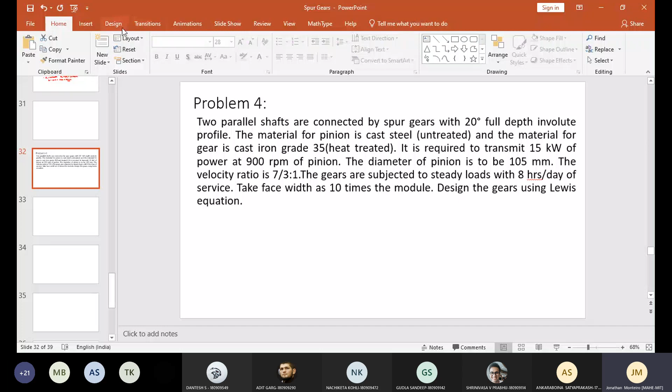There are two parallel shafts connected by spur gears with 20-degree full depth involute profile. The materials given are cast steel untreated for the pinion, and cast iron grade 35 heat treated for the gear. We have to transmit 15 kilowatts of power at 900 rpm. Diameter is given, so in this problem the point is that diameter is given.

So I can write it here: in this particular problem, diameter is given, velocity ratio is 7/3:1, and alpha is 20-degree full depth.

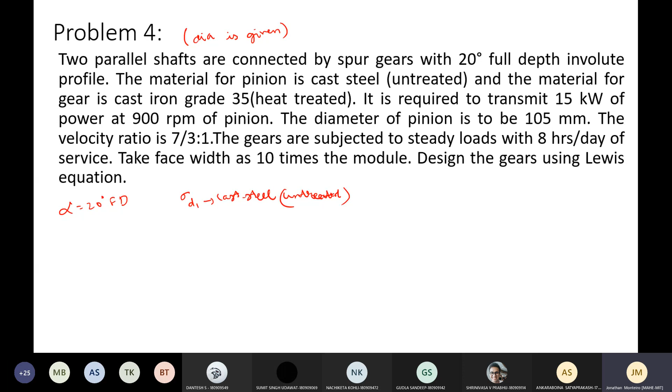Regarding the material, the pinion, sigma D1, is cast steel and untreated. If you look at the book under table 12.7, we have become quite familiar with this table now, because we take both the design stress values and BHN values from it. With cast steel, there's only one type discussed there, so you can straight away take that. We will mostly use this table for all the materials, since we have sigma D and BHN values readily available over there.

So with this cast steel untreated, sigma D1 comes to 138.3 megapascals, from table 12.7 on page 234.

Then we have sigma D2. The material is cast iron grade 35, and it is heat treated. According to table 12.7 on page 234, sigma D2 comes to 78.5 megapascals. You can check it in your data handbooks.

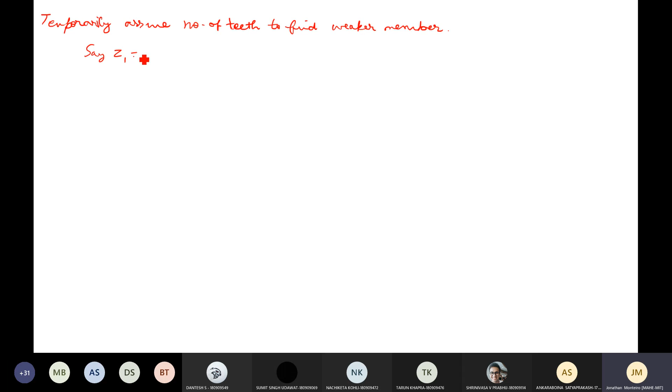Say for example, this has 20 teeth, 30 teeth, etc. In the previous problem you assumed it was say 20 teeth, but if you use 20 here, suppose Z1 is 20, we did this with one of the previous problems. But what will happen to Z2? You see the ratio here, it is 7 by 3.

The ratio is 7 by 3. So Z2 is I times Z1, that is 7 by 3 into 20, which will give you a number of teeth that is approximate, not exact, because if you make it exact you will be left with decimal values of teeth. So avoid this, because since 7 by 3 is given, we know teeth must be a whole number. Any suitable combination will satisfy this.

Of course, you can directly go with 3 and 7, but the problem is 3 is not a very practical number of teeth, and you will totally agree with that. There is no gear with just 3 teeth that will run successfully. So let us not go with 7 and 3, and let us not go with 20 either, because you will simply get some decimal value that cannot be approximated.

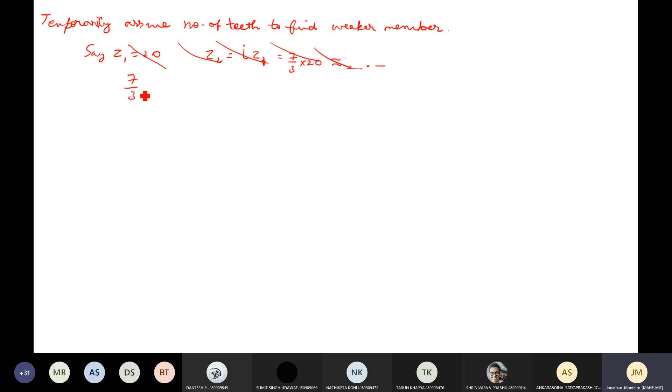So what we'll do instead is multiply the ratio 7 by 3 by some number. How about multiplying both numerator and denominator by 6? This gives 42 and 18. Can you take 10 instead? Yes, you can take that too, 10 by 10 also works.

8 by 8, 9 by 9 also can be taken, of course it's left to you, it's your choice. But principally I've taken 6 because 18 is the minimum number of teeth we take in most cases. In order to reach 18, you multiply by 6. Whatever you multiply in the denominator, the same must be multiplied in the numerator to maintain the same ratio. So what we've done is multiply by a number closer to the minimum required number of teeth in all cases.

Of course, there's no hard and fast rule that 6 should be taken. You can take 7, 8, 9, 10, whatever, but take something that is practically advisable. Practically, 18 is the minimum number of teeth. There is a table we used in previous classes for the minimum number of teeth, so according to that, 18 is the minimum, so we'll go with that figure.

When you set this for 18 according to the ratio 7 by 3, Z2 will be 42. So what is this 42? This is Z2, and 18 is Z1. What we are looking at is the Z2 by Z1 ratio. So I'll write it here: Z1 is 18, Z2 is 42.

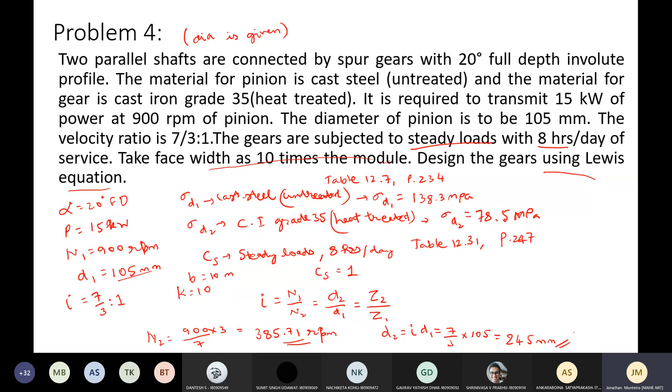So sigma D1 Y1, now compare how much it comes. Sigma D1 we have already calculated in the previous slide, it was 138.3 megapascals. So when you calculate, it will come around 14.28, and sigma D2 Y2 will come to around 10.384.

Even if you use any other values, of course these numbers will change, but definitely this result won't change. Sigma D1 Y1 will be greater than sigma D2 Y2. This conclusion will always be there. That is what we want for the time being, we want to find out which is the weaker member. So now it is very clear, the gear is weaker.

Because sigma D2 Y2 has come lesser than sigma D1 Y1, the gear must be weaker. So design for strength is based on gear.

We use the same form of the equation which we have used for unknown number of teeth, according to equation 12.5b, which tells us m is equal to root of ft by sigma d, cv k into capital Y. This is according to 12.5b, and we will use all the parameters based on this.

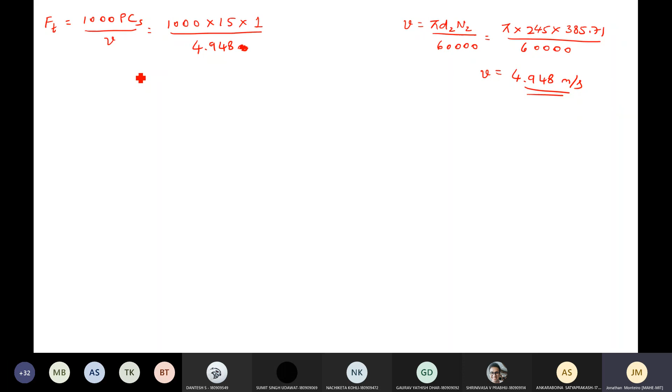So put that here, 4.948 meters per second. So Ft value will be how much? You are getting 3031.53, so 3031.5 or 52 or 53, whichever is closer, you write that. Ft is done, V is done, but we don't want V directly, we want Cv, the velocity factor based on V.

Since this is less than 8 meters per second, according to equation 12.6a, let me write the equation numbers here. So this is 12.7a, page 205. Yeah, so 12.6a, again page 205. We have a series of equations, the 12.6 series gives you the different velocity factors at different velocities. So this is less than 8, so 4.948.

Because of that, your CV value will be 3.05 by 3.05 plus V. So if you substitute it here, you should get 0.3813. This is your CV value. Just all the things I think we know.

So we'll find out what is m square y which is required. That is Ft 3031.52 by sigma d value. Sigma d is 78.5. Next is CV 0.3813. Then we have K, which is 10, and then you have a constant pi. How much is the value? 3.224, or 3.223 or 224, I'm getting around 3, fine.

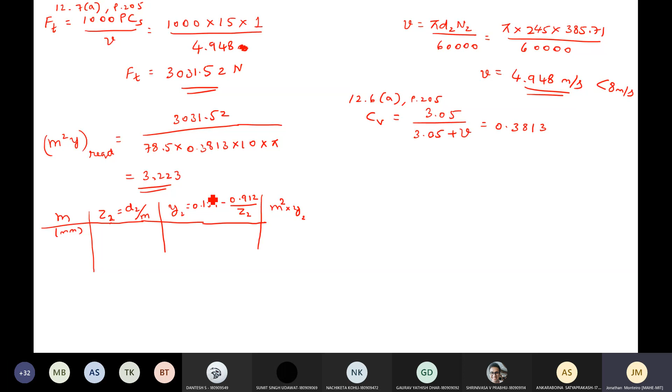Now this is a required value, so it's time to iterate. M, this is the module in mm, we'll try to select one particular module. Then we have Z2, the number of teeth is still not specified, D2 by M, this is the number of teeth. Next is Y2, Y2 is again 0.154 minus 0.912 by Z2. Next you have M square into Y2, or here I can say Y2 to be very specific, we are designing with respect to gear, so M square Y2.

So this module is in mm. Now looking at the figure itself, 3.223, you will get an idea how much we have to use. So let us go to the recommended series tables and try to figure out. Reference is our table 12.2, page 229.

This gives the preferred recommended series of modules. Of course if you take one, it is not going to change much. 1.25, 1.5 also, even after squaring. After squaring and multiplying with y, you are going to get some value around 3. So let us take a value, say 2.5. It's a little bit difficult to find directly here, so let us take 2.5 as a module, and 2.5 falls in the first category, preferred choice.

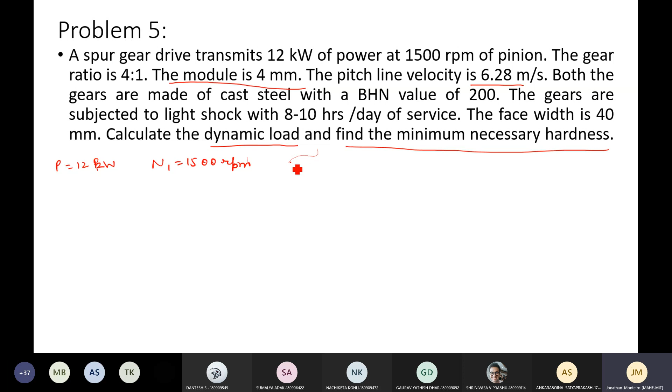Okay, let me write the data here first. This is 12 kilowatts of power P, 1500 RPM N1 of pinion, gear ratio is 4:1, module M is 4 mm, and the pitch line velocity V is 6.28 meters per second. Both gears are made of cast steel with a BHN value - so BHN1 and BHN2 is equal to 200.

Both gears are made of cast steel, so in other words sigma D1 is equal to sigma D2. What is that value? Of course, some value, but for this particular problem I don't think we require that, because all other things are already mentioned here. Module is already given, so we don't require that value here. We'll just mention that both are made of the same material.

And gears are subjected to light shock with 8 to 10 hours per day - I think that also is not required here. If required, we'll come back to it. Maybe to carry this one. Face width is 40 mm directly given, so that means K is equal to 10, comparing module and face width.

So calculate the dynamic load. We'll come to that, if required we'll recalculate some things. Dynamic load FD is given by the FT part, that is the tangential load, plus K3V into CB plus FT, divided by K3V plus root of CB plus FT.

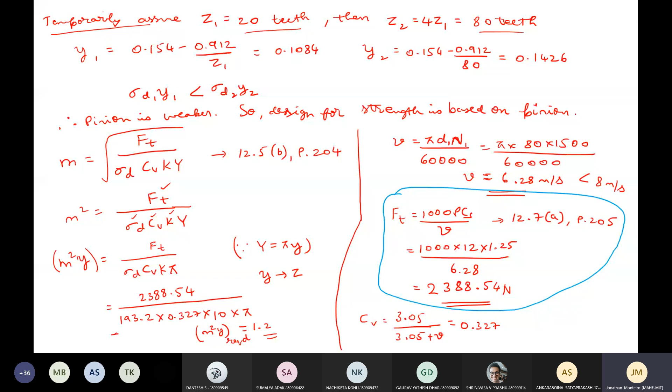So please take this down, you have already calculated this, I need not recalculate again. Come back to this problem. So 2388.54, I'll directly write it here - this is the FT value in newtons.

So K3 is 20.67 in SI units, do not worry about it. V is directly given, 6.28. B is 40, again directly given. The only point is to find out C, the dynamic factor.

Okay, so let us go back to the table numbers - 12.12, 12.13 and 12.14. Let us check pages 236 and 37.

Twelve point 12.13, 12.14. You have to refer all three in order to get this value. So let us start.

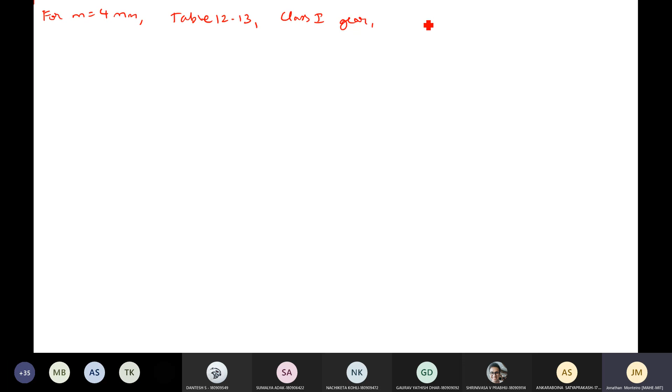According to table 12.13, for class 1 gear, error is equal to 0.0508 mm, and here you have 0.0577 mm. The condition is that probable error should be less than the permissible error. So here this condition is satisfied, E is less than Emax, since Emax was 0.0577. This is satisfied over here.

Now for the dynamic factor, let us go to table 12.12 and try to find out what is the error here. For dynamic factor, what are the requirements? Let me go to the definition. Both the gears are made of cast steel, so here it is steel and steel combination. Okay, next, have they given anything with respect to 20 degrees?

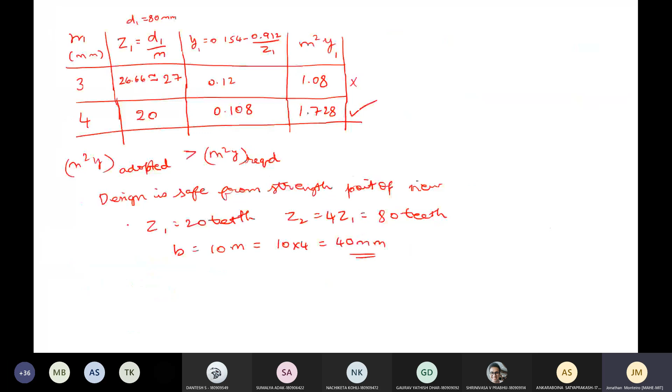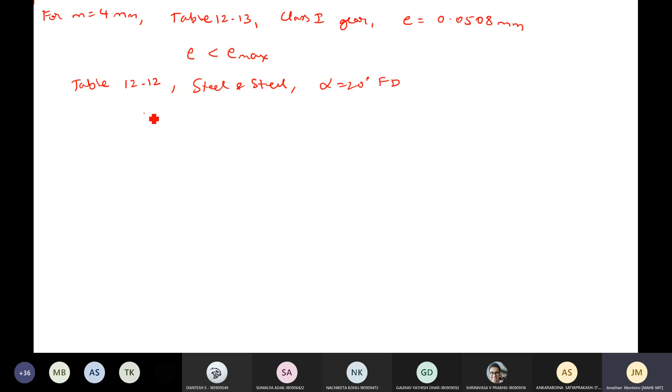Not given. Go back to that same problem. One small data we have missed here, and even if the data is missed, you can straight away assume that alpha is 20 degree full depth if not mentioned. Steel and steel, 20 degree full depth. If you use these values, according to the error table, errors E and the dynamic factor C are: 0.04 gives 457.8, and 0.06 gives 686.7. For this combination steel and steel 20 degree full depth, 0.04 is 457.8, 0.06 is 686.7.

So where does our value fit in? Which is our value? Our value is 0.0508. So for that, interpolate again, and this should be the value of C which we are trying to find.

Interpolation: 0.0508 minus 0.04, by 0.06 minus 0.04, must be equal to C minus 457.8, by 686.7 minus 457.8. C value must be 581.406.

Now substitute in the FD value: 2388.54 plus 20.67 into 6.28, multiplied by 581.406 into 40, plus 2388.54, divided by, plus root of this entire value in brackets, giving 13869.59. Yes, this will be your value, around 13869.5 - I'm getting around 59, but okay, very close to your value.

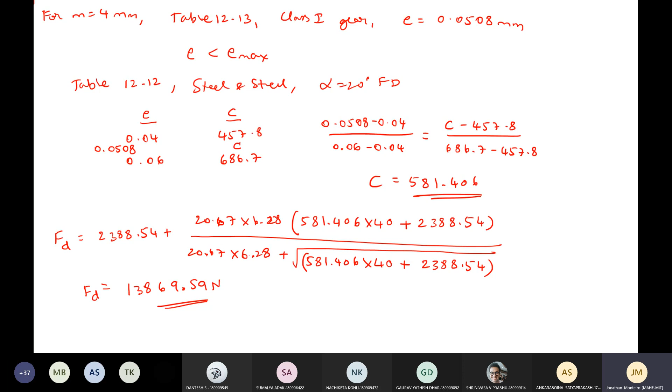So anyway, we will calculate all other things. So d1 is directly given, I think - was it given? Since we have already solved this problem, we can directly take it. Otherwise, necessary information will be given. D1 is 80, correct, D1 was 80. Let me go back and just see that problem here.

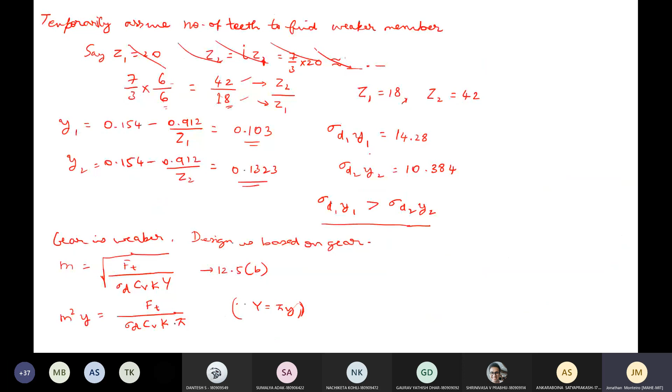In this particular problem, we had center distance 200, and we had the ratio D1 as 80 and D2 as 320. So let me write that down here: D1 is 80 mm and D2 is 320. We'll take all the other values from there; others explicitly will be given here.

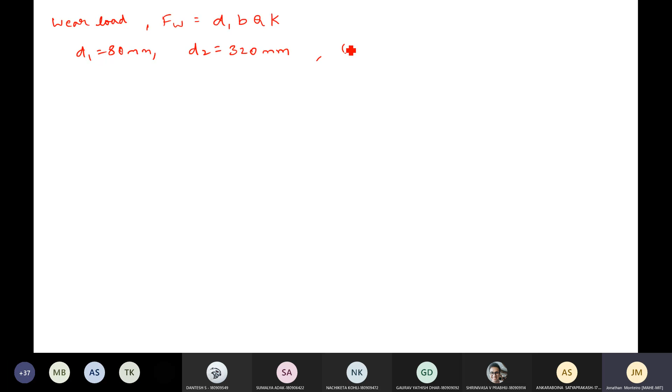So Q is equal to 2d2 by d1 plus d2. So 2 into 320 by 80 plus 320, so it should give 1.6. B is 40, directly given.

Okay, so D1 is 80, that is also there. So let us calculate what is what about the K value. Okay, that is the question. What should be done with the K value? So let us go to...

This is one new thing that we have not discussed previously, table 12.16. Let us go to table number 12.16. See, previously what we had done is when discussing this K value. Okay, let me go to this page. Previously, what was done is, what is this K?

K was a function of sigma ES and all that. Many things were there, sigma ES square. You might remember some calculations we had done. Okay, that also can be one of the things. But there is a table which describes all those values. So let us go to this table to find K.

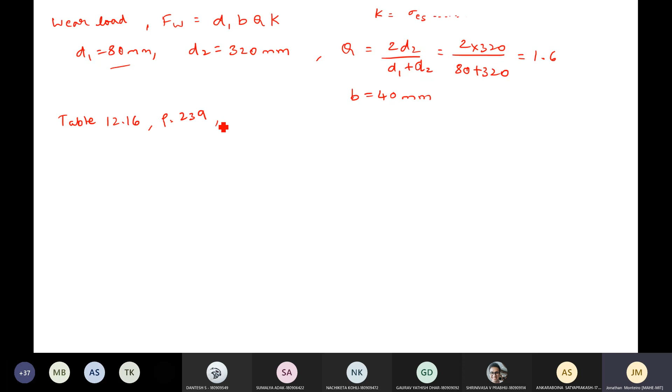Under this, you notice that there are combinations of materials. So you have steel and steel, both pinion and gear, steel and steel you require. Pinion is steel, gear is also steel. Fine. Then alpha is 20 degrees. BHN value for both is 200. Okay, this is both 200, BHN1 and BHN2.

So if you closely look, there is only one combination which gives that. Okay, carefully observe, there is steel and steel, both the ways, pinion and gear. Alpha is 20 degrees. BHN1, that is for steel also, that is pinion also, it is 200, and gear is also 200. With all those things, only one value will fit in over there, and that value is 0.539.

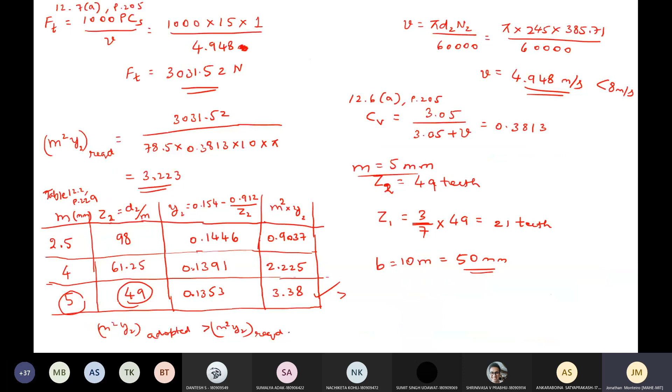Even if you do the otherwise calculation which we had done previously, let me go back to that problem in one of the classes, just to recap your memory, just to remind you what we had done. I think problem number 1, yeah, problem number 1 we have done.

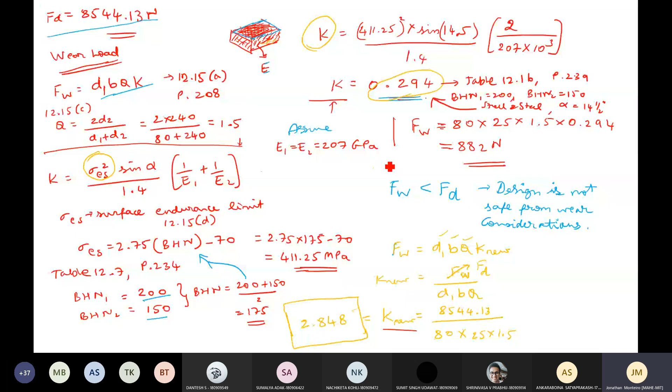Similarly, for this case, since the method is already discussed, we need not recalculate all the things, because this combination we find 200 and such values. Even if you didn't have this combination, for example say this was absent from the table, you can go by that method. Okay, sigma ES square and with the sine of 14.5 degrees by 1.4, that formula you can still use. So both these things, whether it is with the table and without table, both these things we have made aware of.

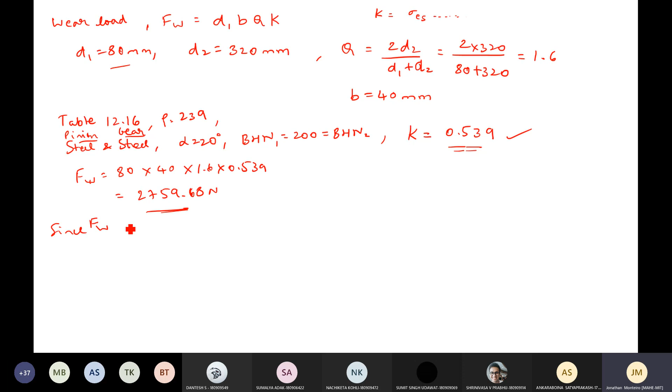Okay, now 0.539 is the value as given in this problem. Let us calculate how much it comes. D1 is 80, this is 40, this is 1.6, and this is 0.539. So this is the small calculation which comes to around 2759.68. But we know this is not at all sufficient. Okay, so since FW is lesser than FD, design is not safe from

wear consideration. So equate it, let Fw equal to Fd new. That is, value you take the same. In other words, what I am doing, D1 B Q K must be equal to Fd, but K should be a new value. So D1 value, okay, all other things remaining the same, the K new value must be equal to Fd by D1 B Q.

So this is 13,869.59 by 80 into 40 into 1.6. So this value comes out to be 2.7089.

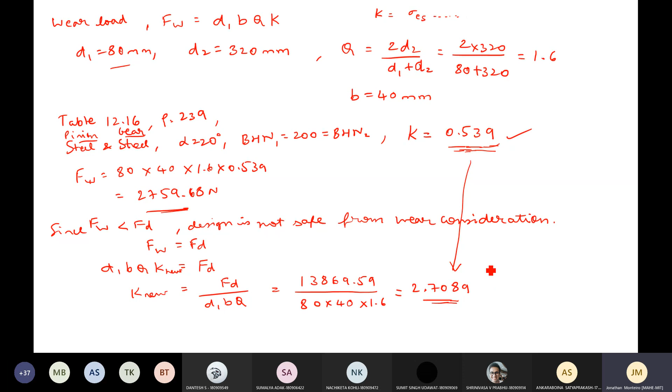2.7089 is the K new value. Okay, first let us write the conclusion, then go to the next slide. You have taken a note that K new value should be 2.7089. The value given for the untreated material problem, that is, a material taken straight away without any hardness changes on the surface, was 0.539. Now you require 2.7089, which means it's a surface property that needs to be altered, from this value to this value. So let us write the conclusion first, then look at the table and find the hardness value.

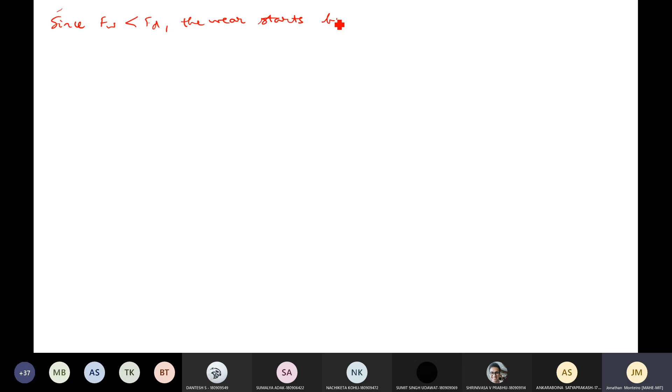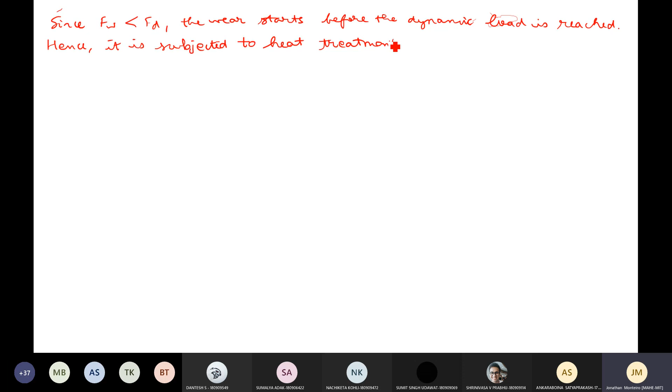Since Fw is less than Fd, the wear starts before the dynamic load is reached. Hence, it is subjected to heat treatment so that it can be surface hardened to a higher value of BHN, for which the value of K is 2.7089.

So it's a surface property which we are dealing with, without changing the material inherently, without changing the entire material itself and providing a new value of sigma d. What we are doing is increasing the hardness value of the surface by subjecting it to heat treatment. So which value are we suggesting? 2.7089. Then the value of how much it was, 0.539, yes. So with 2.7089, which value will come around?

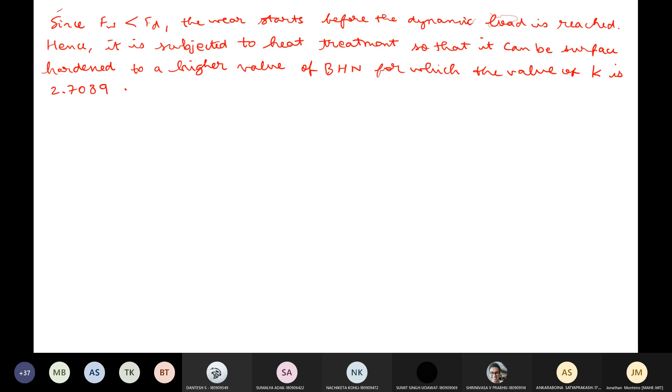Okay, of course here in the table, when you look, if you look in the table 12.16, page 239. For these things, alpha is equal to 20, it should be steel and steel combination. Any value which comes to 2.7089 or beyond. Actually we have one line which gives us 2.3, but that is not at all sufficient, so we can go beyond that.

Yes, we can go to a line which tells us that BHN value of 1, that is the pinion, should be 450, not 400. And BHN value of 2, that is the gear, also should be 450. Just look at that line. With these two combinations, the K value comes out to be 3.226.

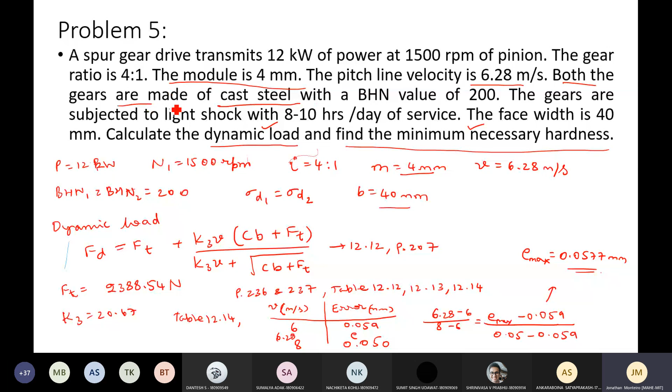And it suits our problem also. If I go back to the definition, both of them are made up of cast steel, so both are made up of the same material. So it makes sense to give that heat treatment to both in the same way, such that both BHN values are the same, 450, 450. Only then this can be achieved.

Of course, the endurance limit, you see, initially when it was 200, it was only 480. Now it has gone to 1167. So almost 3 times increase in this endurance limit or surface hardness value. With this combination, sigma ES comes out to be 1167 according to the table, in megapascals, or Newton per mm square.

So we can calculate the BHN value with the equation also, right? Yeah, correct, that also can be done. That way it is coming 415. Okay, so that is what I told you. 12.16 is a table which gives you some standard values. Any intermediate values, intermittent values, you can calculate using the equations.

Okay, so this is a rough suggestion. We can use BHN value to be 450. Maybe 415 or something you get, that's definitely possible. Of course, if you use the table, this is the suggestion that we have.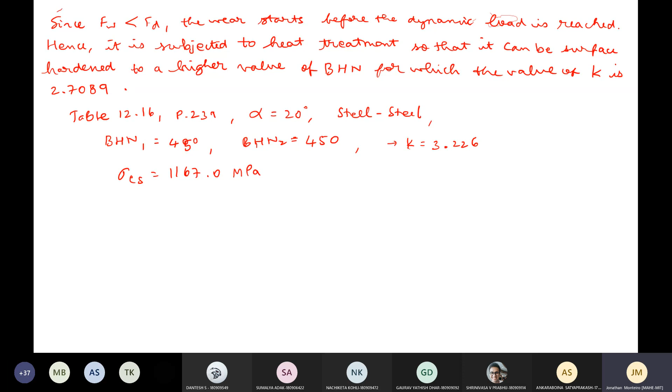So I think we got a fair idea about how to tackle the problems when diameter is given, or only the number of teeth is given. When both are not given, which one to assume, from where to take the values, and then what to do with the dynamic load factor, which BHN values to select, and the importance of materials and their properties. So I think these are the different types of problems. All types have been discussed in the spur gears.

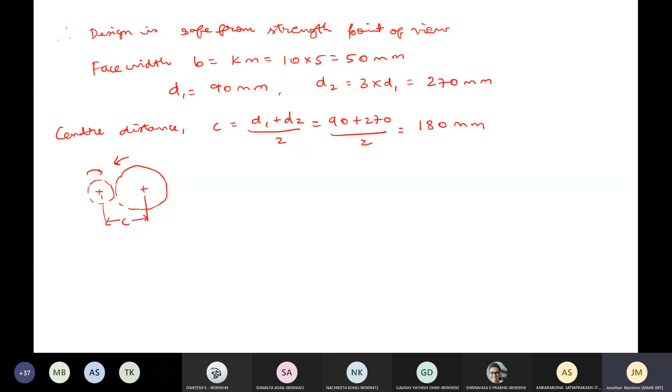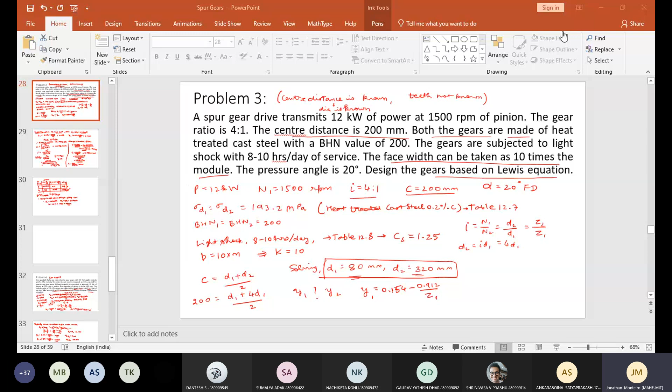We can now slowly move on to the next set. We'll just give an introduction today, and hopefully... so we'll discuss a little bit about helical gears, how they are different from the spur gears. That's what we'll concentrate on today.

As the name itself suggests, it's helical, or it gives you a helical groove on a cylinder. So what is a helical gear? It's a groove cut on a cylinder in such a way that if you continue or project the groove, it will form a helix over the cylinder.

So it is something like this. You have a cylinder, and this groove will continue just like this. You have seen a drill bit, a twist drill, that is a helical groove, right? With a different angle, it forms a helical gear itself. Each of those grooves form a teeth. So that is a helical gear for us.

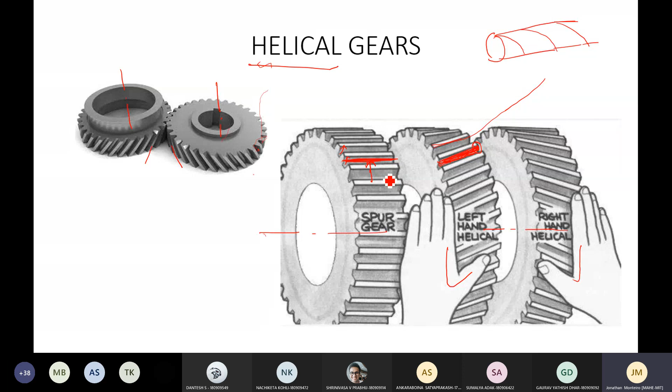So this is the major difference between a spur gear and helical gear. That is why spur gears are usually used for high loading applications, particularly for the first gear combination in automobiles. The second, third, fourth gears, where torque requirement is less and speed requirement is high, we go for helical gears - this is a less torque combination.

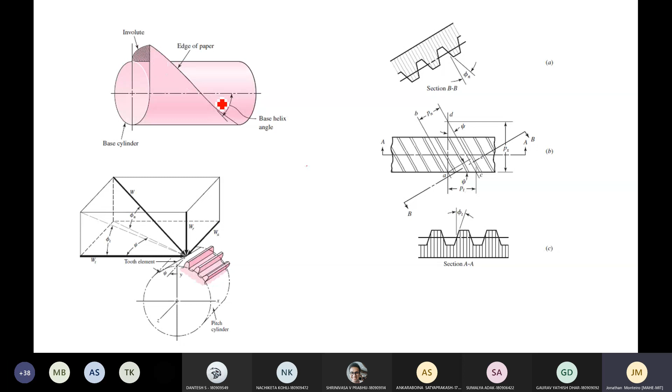Rather than explaining these sentences, let me explain what happens in the next slide. We have understood that helical gear means it's like a helical groove or a helical line drawn on a cylinder. Now just imagine what happens - this is one particular figure here. We'll go to this explanation of what these angles mean in the next class, but let us concentrate over here.

What is this? See, in spur gears you did not have this complex figure. Let me give an example with respect to spur gears to understand the differences. In spur gear, you had one tooth engaging, disengaging. How many components did you have? You had this normal force called involute F, and this was divided into just two components: one is Ft and one is Fr.

Moreover, we have only two things - the F component, the involute component, is divided into two parts: Ft and Fr. Only two components. So the force diagram will be something like this - this is Ft, this is Fr, this is F. Only two things. But look at helical - it's not so easy.

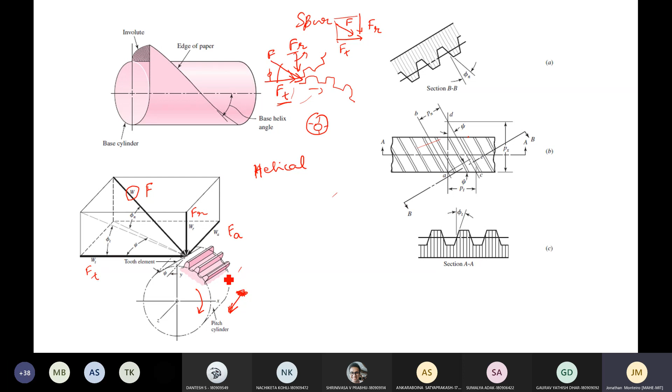In spur gears you can give only radial bearings. But in helical gears you require a combination of radial and also axial bearings, to support the gear when it is getting pushed in or out of this plane. I hope you got an idea.

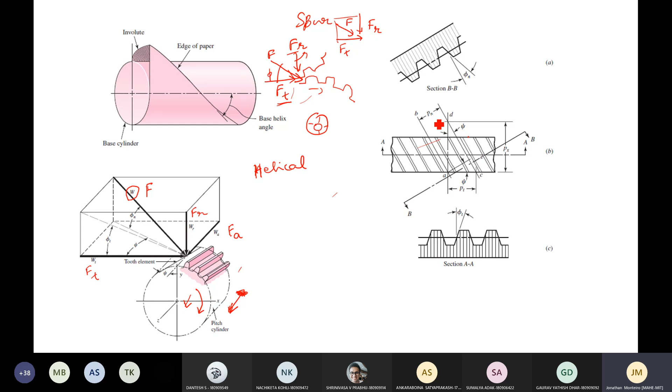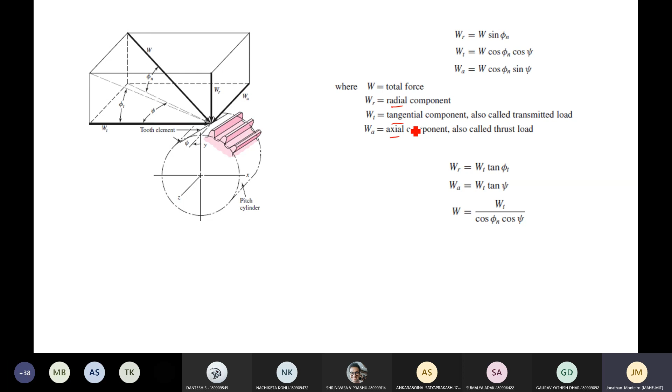In the next class we'll go into all the details: what is phi n, normal module, normal pitch, circular pitch, etc. What are those combinations and how equations are formed, all these things we'll discuss next class. This is one of the slides we'll also discuss, about the radial, tangential and axial components, how they are balanced, and how to calculate all those parameters and solve problems.

So just in a nutshell: spur gears are very easy to handle. They do not produce axial thrust. The Fa component is 0 here, whereas in helical gears it exists.

That is why you have to give a taper roller bearing or some bearing which can handle the axial load.

Second, spur gear is more efficient compared to a helical gear of the same size. Why is it called more efficient, even though rattling sound is more? Remember, spur gear only has line contact, whereas helical gear initially has a point contact, then maybe a line somewhere in between, but overall it will slide over one another, almost a surface contact. So more heat is generated, meaning more power loss and less efficiency in a helical gear.

Even though it is very quiet in operation, the price we pay for quietness and smooth operation is that it consumes more power and is less efficient. And finally, spur gear being the simplest is easy to design and manufacture, whereas helical gear is more complex to manufacture. Maybe you have gone through the machine shop class where you had an indexing plate in order to make a groove over a cylinder and manufacture a gear.

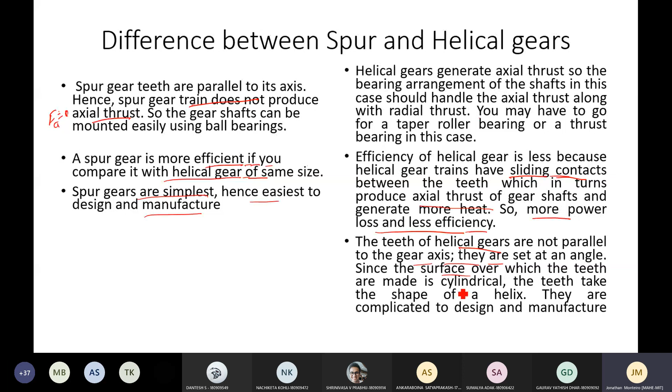I think with this small introduction, we are set to understand the various parameters and their definitions. In the next class, we will try to solve some problems.